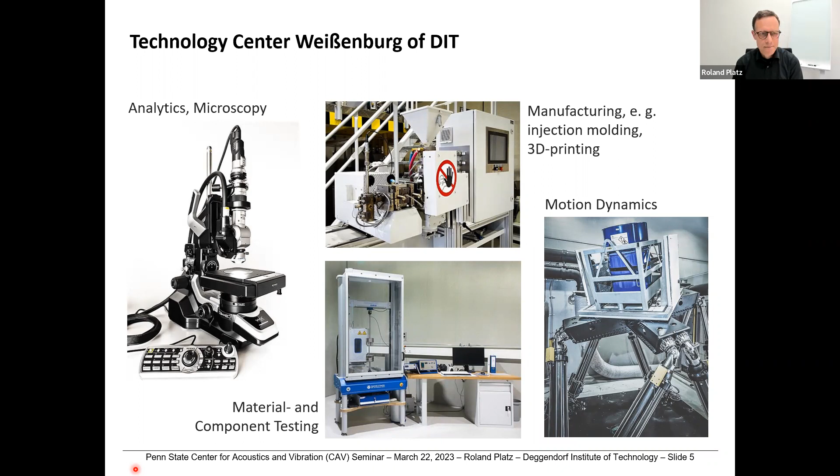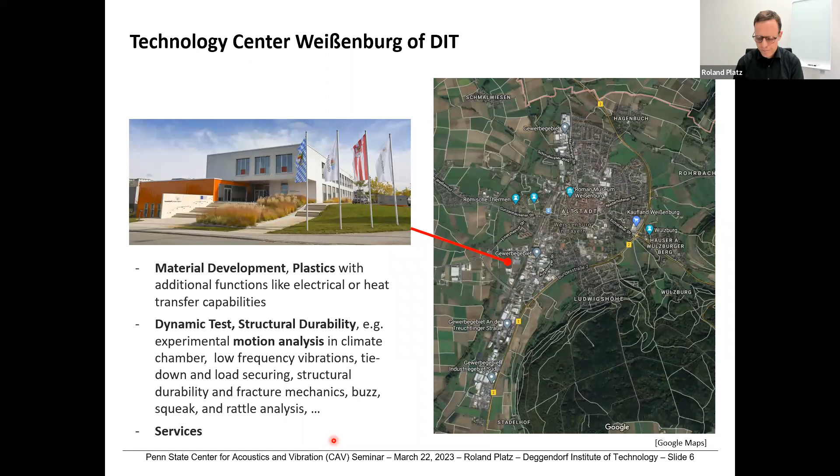The Technology Center in Weißenburg deals with plastic material development and applications, and also motion dynamics, which is what I'm working on. For motion dynamics, we have a rather big motion platform in the basement where we do structural durability and vibration tests. On the plastic side, we have manufacturing facilities for injection molding and 3D printing. We can do material testing, component testing, and analytics. We share this small building with another University of Applied Sciences; they do more of the teaching, and we do more of the technology work and research.

Model form in structural dynamics. This is one of the parts I'd like to point out. For those of you not familiar with the notion of model form and uncertainty, it's a wide range, there are lots of aspects, and it's hard to grasp sometimes. So I'll try to give you an introduction into what model form in structural dynamics means, what we consider uncertainty quantification, and what uncertainty actually is. I don't have to tell you where to find structural dynamic systems; you're very familiar with that.

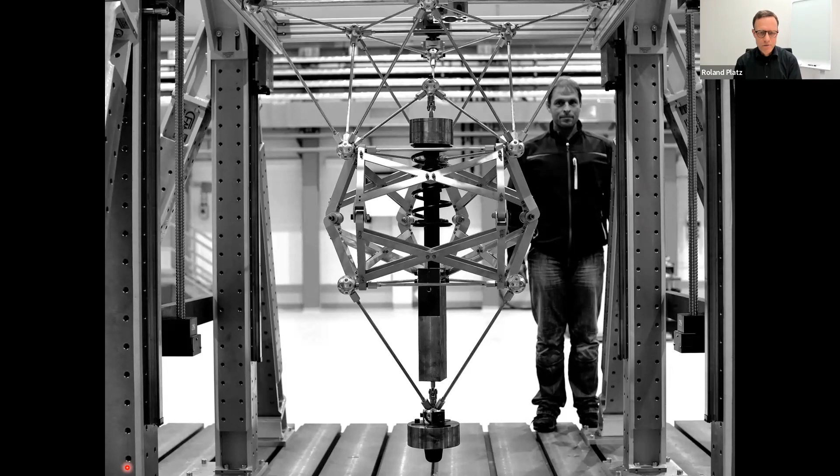Before I joined Deggendorf Institute, I had my sabbatical at Penn State University in the architectural engineering department with Dr. Sez Atamturktur. Unfortunately, after 6 months, we were witnessing the pandemic, so it slowed down a lot of things. Before that, I was involved in a collaboration of the German counterpart of the NSF, the DFG, the Deutsche Forschungsgemeinschaft, German Research Foundation, a big collaboration dealing with uncertainty in structures and structural dynamic systems. We wanted to know how loading and strength of a system may come out as an uncertainty measure. And we built a system with the same performance requirements as an airplane landing gear.

And we called that the modular active spring damper system. And this is how it worked. We had that in our lab, and we were just doing drop tests to see how the loading develops in that system. So we had different kinds of strut and strut elements. We had a spring damper system. We had joints, and all of that have their contribution to the dynamic behavior.

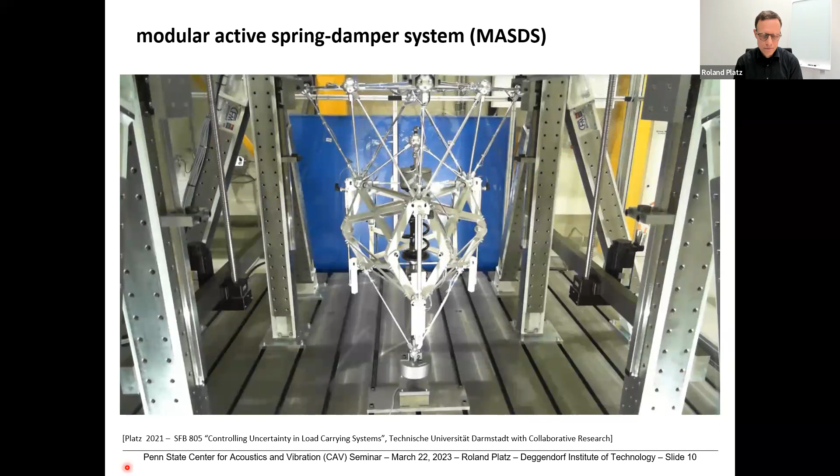And we were interested in looking at the uncertainty that arises in each development stage in the product development process, from the first idea to this strut or this spring damper system that you see here. Now, what model form can you actually use for that? Well, there are several options, as you of course know.

If you have a structural dynamic system, you need to answer the question, what kind of model am I going to derive for it to have the best representation of what is happening with the real system? Of course, we all know that all models are wrong, some are useful. That's the same as we have in here. For example, a multi-body representation of this system, or a finite element representation of the system. They all have their pros and cons.

They're all not perfect. And due to the fact that there is imperfection, we would like to know to what degree this imperfection is going to show itself. And that's where we need to look at uncertainty and uncertainty quantification, especially model form uncertainty quantification.

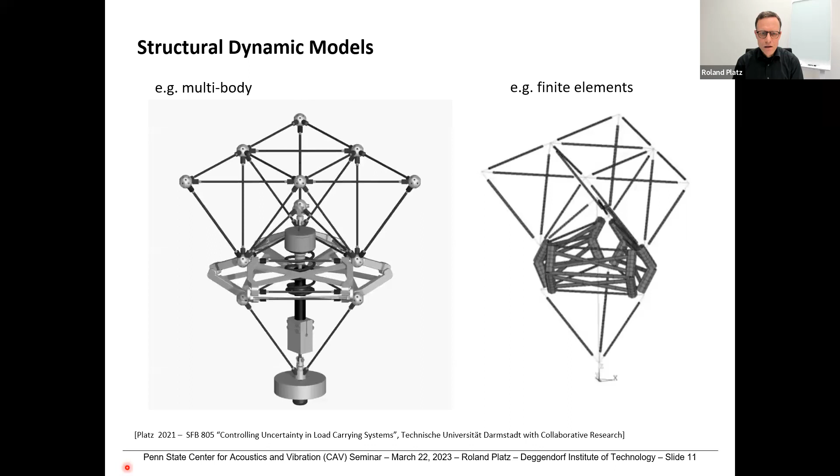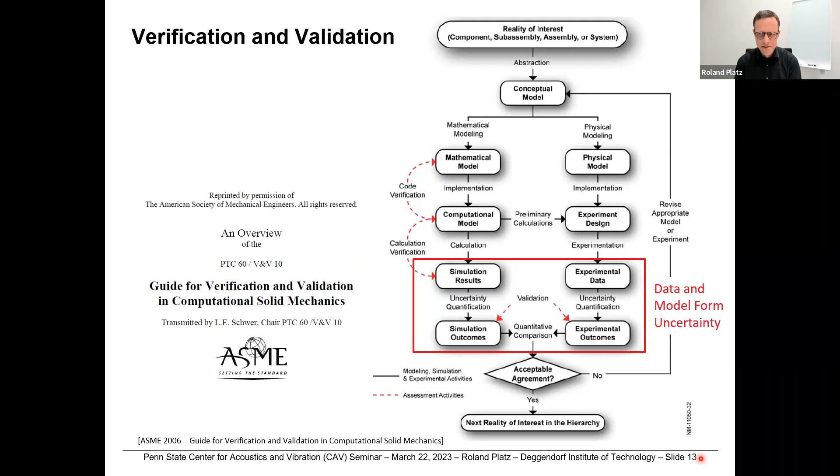So let me talk a little bit about the terminology of uncertainty itself. When I talk about uncertainty in structural dynamics, I mean basically two things. One is the model form uncertainty, and the other is the data uncertainty. Let's start with data uncertainty, which we are all probably more familiar with. It takes into account variability of parameter values, for example. We consider data as being model parameters as well as state variables.

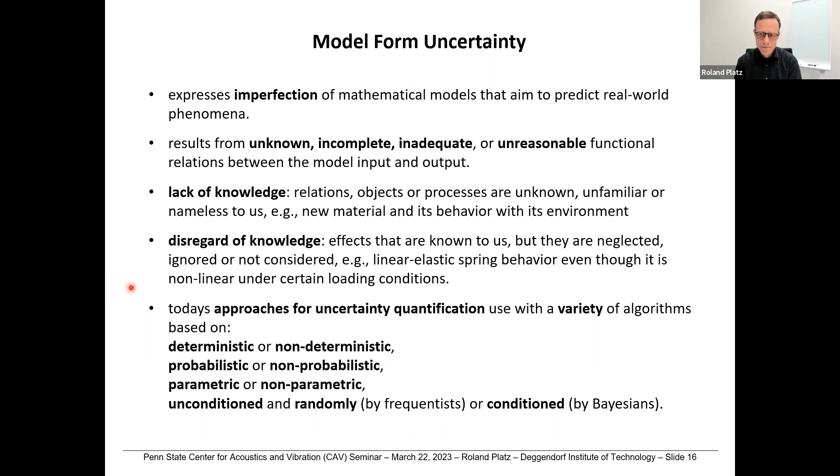So you can use deterministic or non-deterministic, probabilistic, non-probabilistic, parametric or non-parametric, unconditioned. That's when the frequentists come in, who say that everything is on a random basis, or the Bayesians, who say that everything is actually conditioned and there's no such thing as pure random chance. So you have lots of possibilities to do your uncertainty quantification. And those are the challenges that we face today.

From my personal point of view, and I've seen a lot of talks about uncertainty quantification, I've spent considerable time going through literature and attending conferences about this topic. What I found after some years is that somehow this model form uncertainty quantification is pretty much stuck in academic efforts and frameworks. Algorithms become very comprehensive, very complicated, and the mathematical costs are getting really high.

And the challenge to get to the idea behind each of these approaches is limited due to the lack of consistency and comparability in notation and application. For example, if you are in computational mechanics only and you don't have a real test rig, you just create your own application example.

A so-far realistic experiment, but it's never as, I would say, messy as it can be when you do real experiments. What I've seen so far, for example, is they just put a little bit of noise into their model outcome and consider that as the experimental test. But it's not just noise, it's bias, it's all kinds of stuff that is going on there. So there's also limited feasibility and practicability to it.

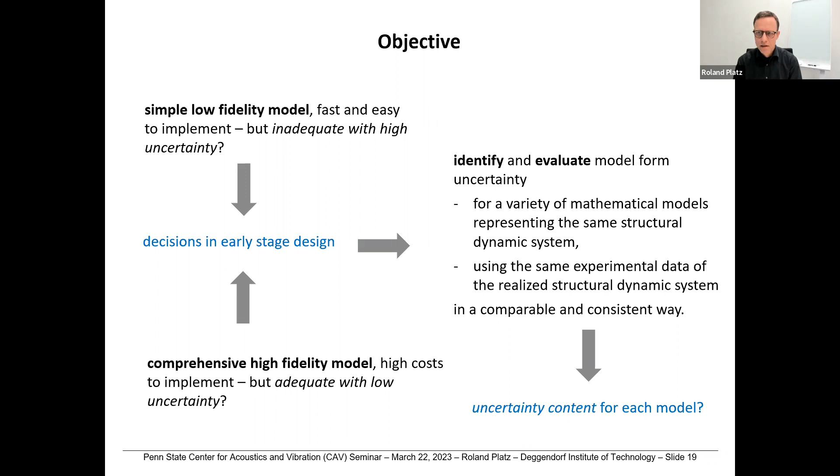So this reference structural dynamic model has to be, and that was the idea behind it, easy to understand. It has to be simple, but not too simple. We don't want to waste too much time in getting this system behavior tracked down and understanding the physics behind it. It has to be pretty much obvious. It should be a pure physics-based system that we can completely describe with physics, but also allowing phenomenological extension and improvements.

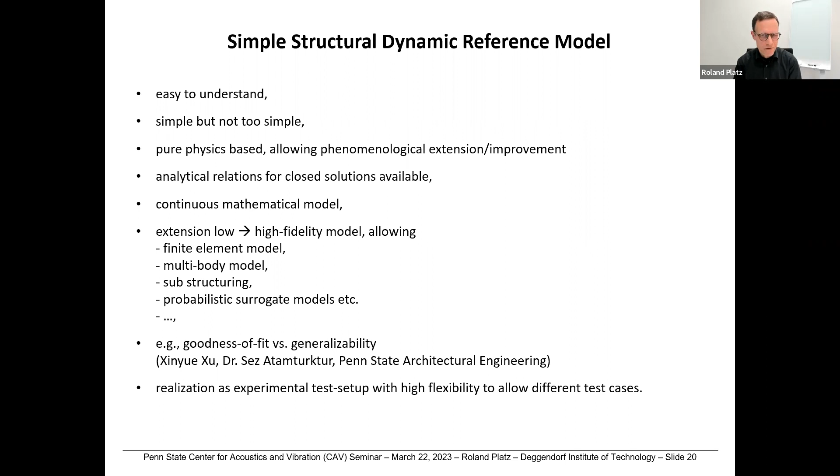The team of Dr. Sez, for example, right now is working on the same reference model that we have been working on for quite some time now, and is looking for the relation between goodness of fit and generalizability of models, and she's doing that with one of her current PhD students, Xinyue Xu. And the good message here is there is experimental data, lots of experimental data for this very reference model that I'm going to describe right now. And those of you who visited my talk 2 years ago may remember this picture.

The motivation was to find a system that is easy to understand and easy to model, but also allows for more comprehensive modeling. So I simply took a car and a compression leg and modeled the dynamic behavior of that very compression leg in that car. And if you do it in the simplest possible way, you just have mass, damping, stiffness, and that's it. But that seemed to be a little boring in the beginning.

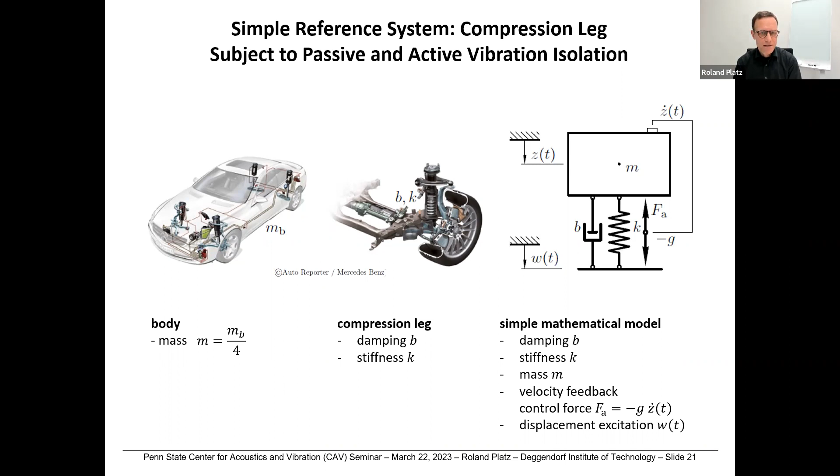So we thought we'd make the system also active, meaning that we add an active force into it, which will be realized by a velocity feedback control force to also allow better dynamic behavior. And this leads us to a vibration isolation problem that can be done both passively and actively. So what do we mean by that?

So if you have the passive configuration of this one mass oscillator, and you add an actuator and energy into it and have it active, then you can overcome this well-known trade-off in vibration isolation: if you have high damping going through the resonance, you lose this benefit in your isolation frequency range. And if you have very low damping, it's very bad going through the resonance, but it's very good going into the isolation region.

And having this system active solves this trade-off, because you can have high damping going through the resonance and also high damping being in the isolation region. And this you see in the curve of the amplitude frequency response with the thick lines. Those are the active cases, and the thin lines are the passive cases for different damping.

And I was choosing one particular case that is in red, where you see that until you reach the resonance, it has the same dynamic behavior, but due to the fact that I'm going active, I have a much better behavior going into the isolation region. Now, how can I model this? This is the simplest way to model it, one mass oscillator.

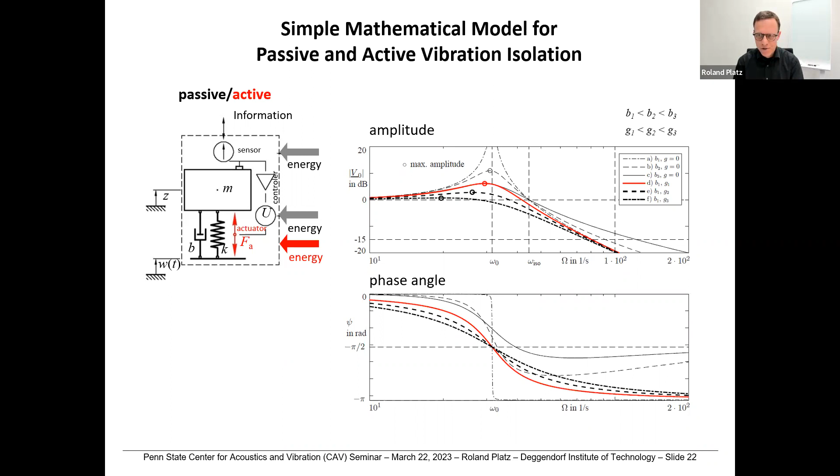But also with this very simple model, you can ask yourself, do I only stay axiomatic? Do I just stay linear? Do I just stay time invariant? Do I just stay with low fidelity in this model? Or do I allow to improve my model when I validate it to have empiric, nonlinear, time variant, high fidelity issues here as well? So what we did so far is I was doing the investigations for model 1, the one mass oscillator model.

I was creating a 2 mass oscillator model of the same problem. We will see why the 2 mass oscillator model comes into place. And model 3 is a finite element representation of the very same thing. And there are numerous other models out there. And this is what I would like to ask maybe some of you, who would work on a model that is modeling the same system, but in different ways, and then validate that against the very same experimental outcome.

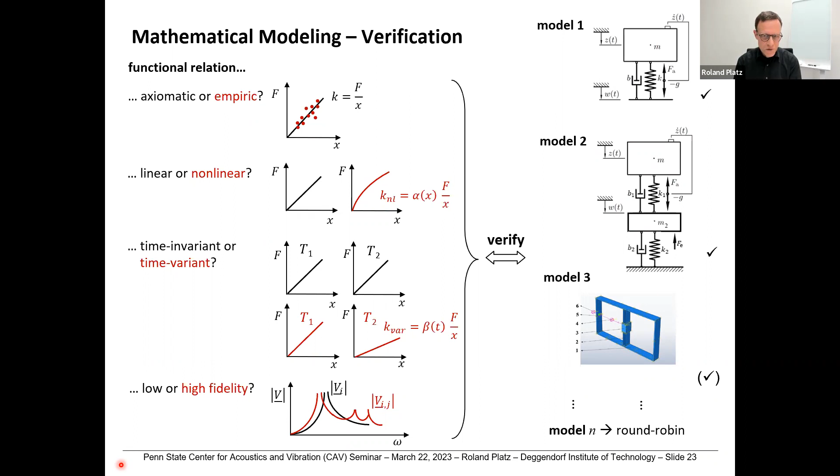So we verified so far these very simple models. And when it comes to model validation, we were validating that with the experimental and realized system. And I will come to that realized system in a moment, because there's not that much to see right now, except that you obviously excite the system with a modal hammer. So for now, the takeaway is we have a realized system and we have experimental data to validate all different kinds of mathematical models.

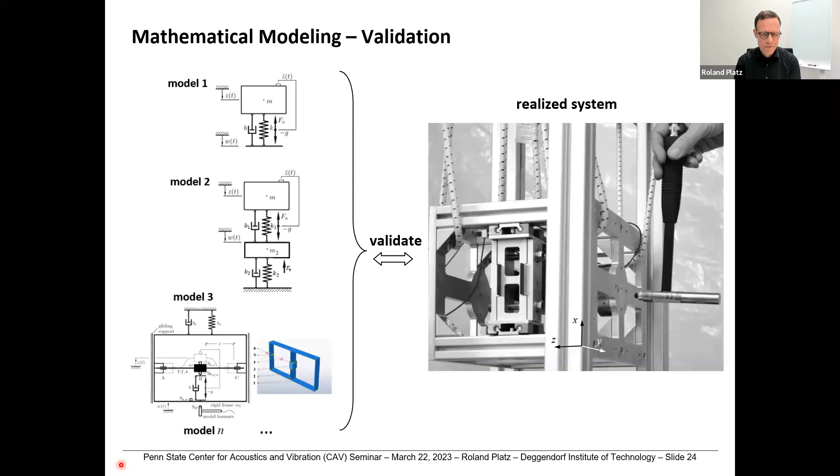If you look at this table here, so far we have model 1, model 2, model 3, and model n is yet to be defined within the round robin, for example. And you see different categories, what the model is standing for. Is it analytic, numeric, axiomatic, empiric, linear, nonlinear, and so forth. So if we look at the very simple model 1, we see that it's analytic, it's axiomatic. There's no discretization, no empiric data, no nonlinearity, no time variance, no high fidelity. We did calculate an outcome, which is not that hard for a one-mass oscillator.

So far, I was calculating the discrepancy between the model and the experimental output, but only deterministically. The uncertainty going probabilistically is still pending. We also did a 2-degree of freedom model, but it has the same criteria. Its discrepancy and uncertainty are also still pending. For the finite element model 3, the discrepancy and uncertainty have not even begun yet. But as I said, there are more models to come, and they all have to validate themselves against the realized system.

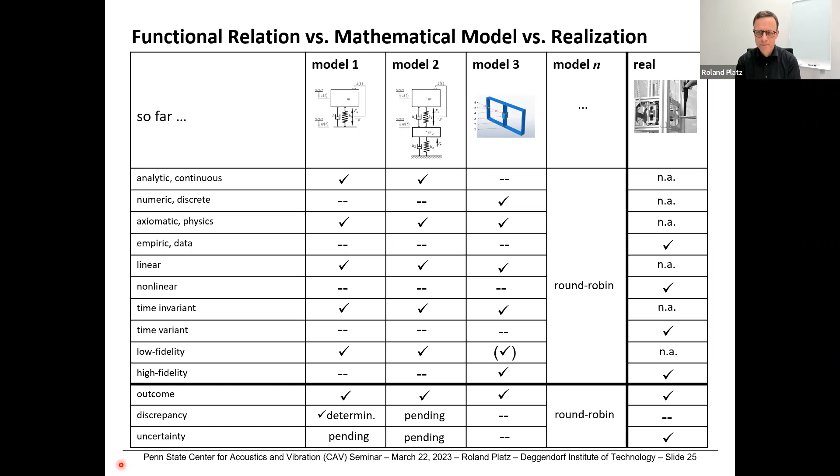So this is just another wrap up of what we want to do with the round robin. I just skipped that. So for the last 5 minutes, I hope I still have 5 minutes.

I'd like to show you ongoing and past investigations on this most simple model form that we were using. So you have the one mass oscillator. It is analytic, axiomatic, linear, time invariant, has low fidelity, just uses physics, and it's continuous. The equilibrium of forces is there. You have the excitation. In this case, it's a base point displacement excitation for this vibration isolation dynamic outcome.

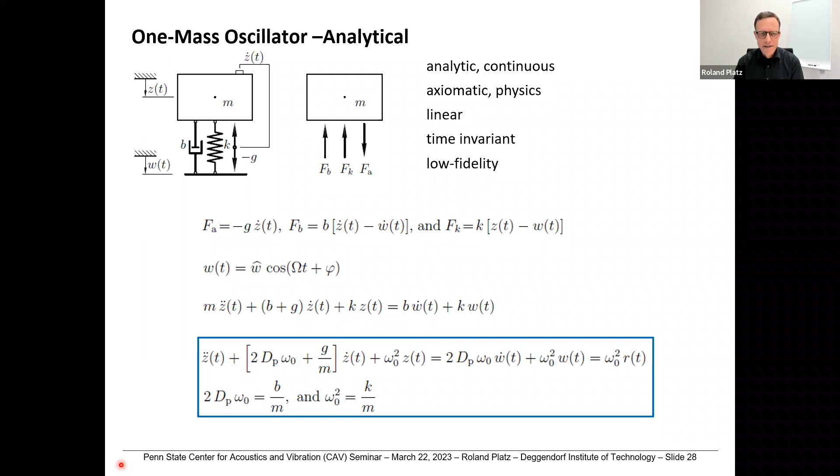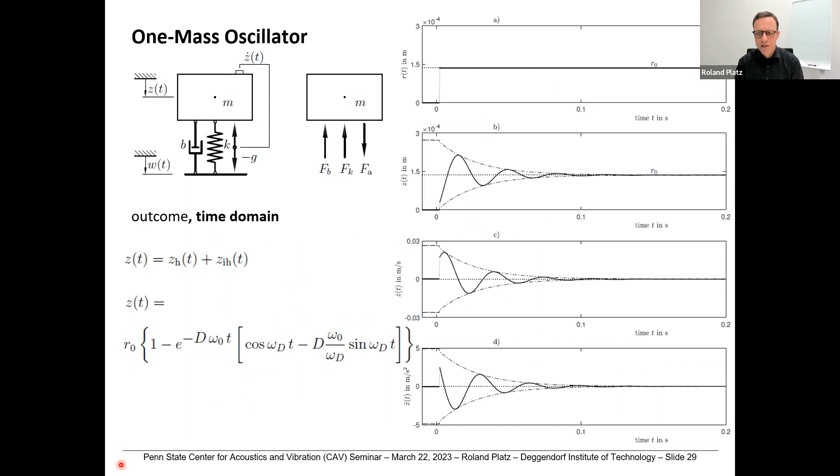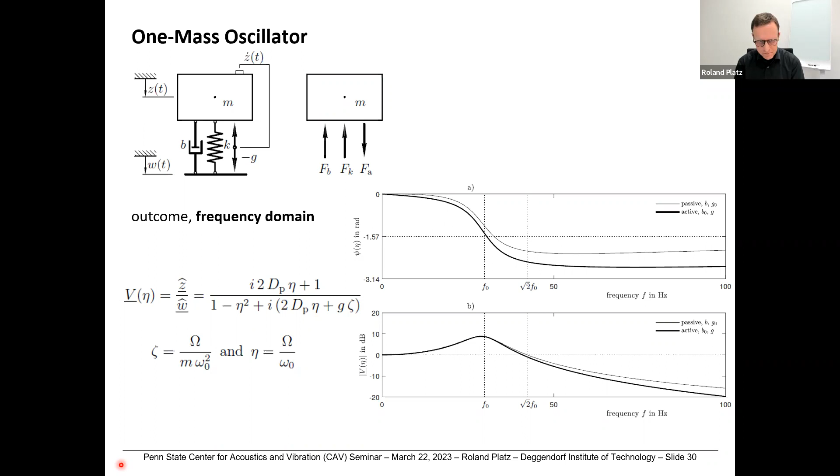And now we need to validate that against some experiments. So how did we realize that experimentally? And it turned out it wasn't that easy just to have a one mass oscillator subject to vibration isolation to be transformed into an experimental setup. So we did some tries, and then we came up with the idea that we actually put this one mass oscillator into a frame.

I actually wanted to have a shaker, but I didn't have the money to do that. And when I went to your university in State College, it would have been too heavy to carry on. So I decided to just use a modal hammer for that, and that was doing the same good work.

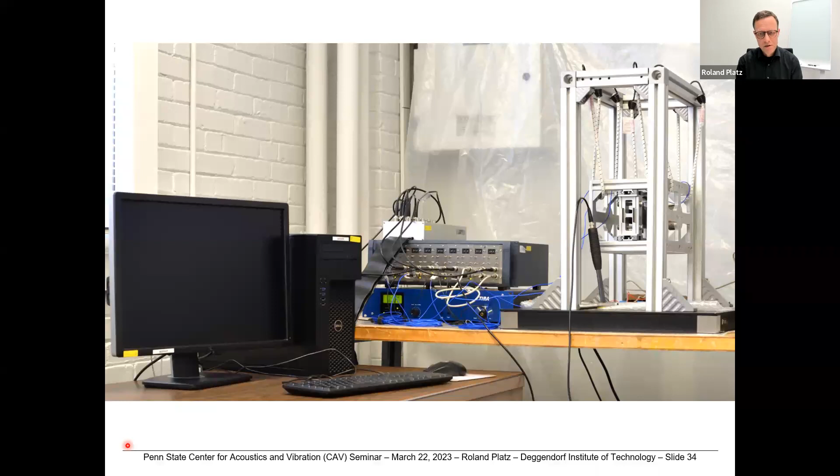And for damping, which is always the critical part, we used a simple voice coil actuator that we used for the passive damping and for the active damping. And it creates an active as well as passive damping force. And we had here a dSPACE system, a real-time controller that is giving us the controlled damping forces in case that we have pure passive damping or pure active damping. And that worked actually very fine.

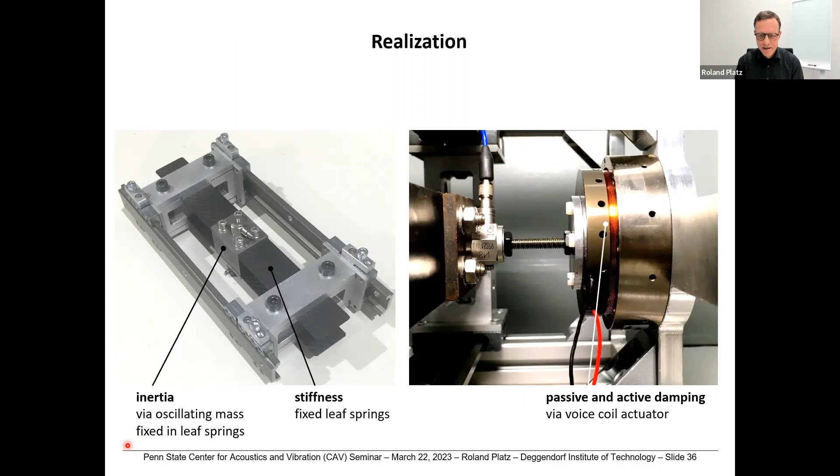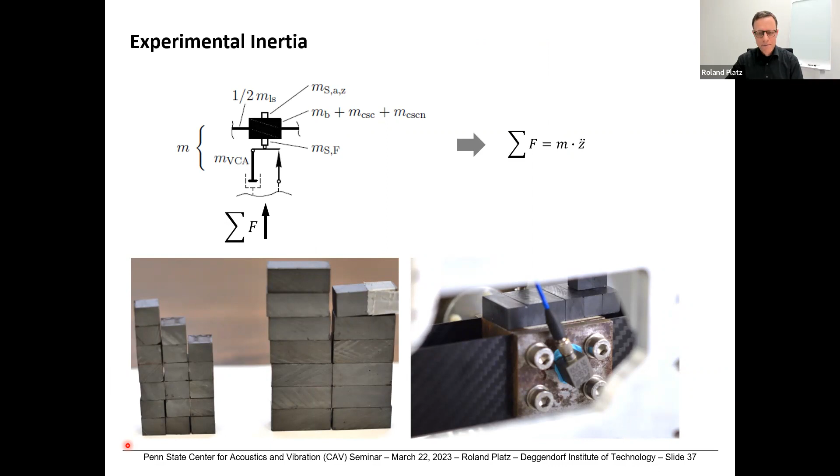And this is how we realized the inertia, the stiffness, and the passive and active damping with the voice coil actuator. And here you see that changing the inertia was simply done by magnets that we put on the original mass. So we are able to vary the mass of the system. We are also able to vary the experimental damping output by using the voice coil actuator and taking into account the electromechanical circuit.

Now, what kind of data is available? Also, the data I would like to share with everyone who is joining the round robin is when you look at the design of experiments. I was creating 3 different scenarios for stiffness, for mass, and for damping. So all in all, I was creating 3 different stiffness cases, 3 different mass cases, and 3 different damping cases for passive and three damping cases for active.

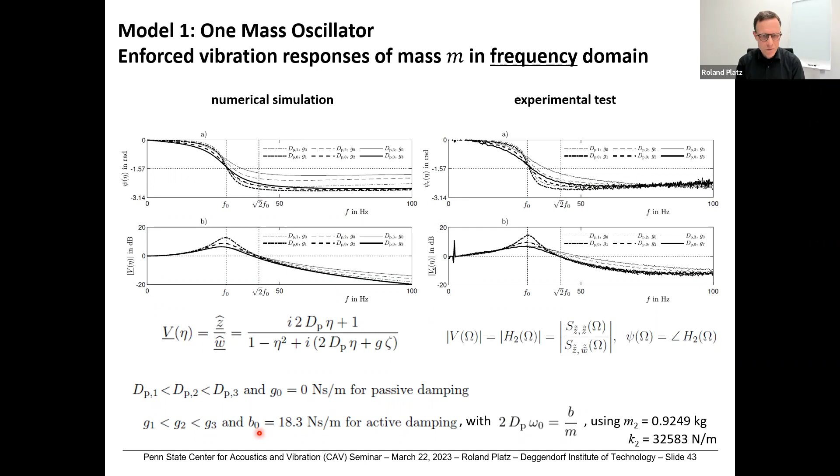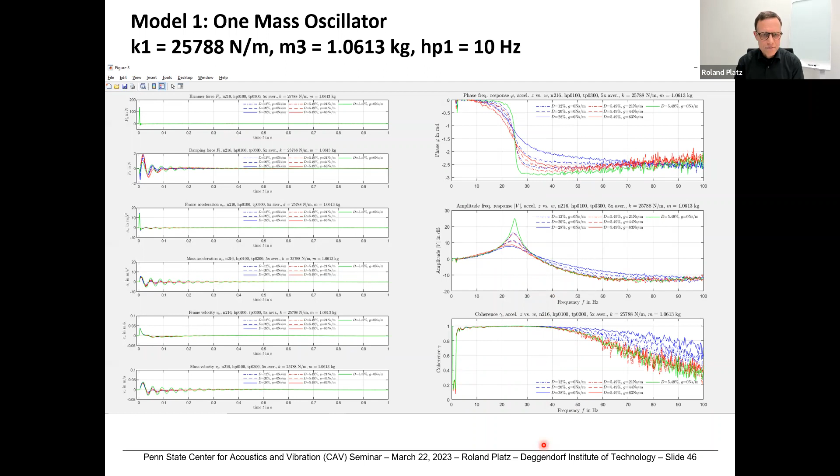Now, the first look into the discrepancy when we have a passive vibration isolation case and we compare the numerical output with the experimental output. And I was just doing a deterministic least square fit of the parameters that you see here. And I was using control parameters that I pretty much know how to handle. That is the frequency and the mass, which is easy to weigh. And calibration parameters were just the stiffness and the damping. So it was kind of a model updating.

And you see here 3 different cases. This was for the lowest damping, this was for the medium damping, and this was for the highest damping. The phase shift, the amplitude frequency response, and the coherence function. And you see the higher the damping, the higher the discrepancy. Whereas if you have very low damping, then you have very similar simulated and experimental results.

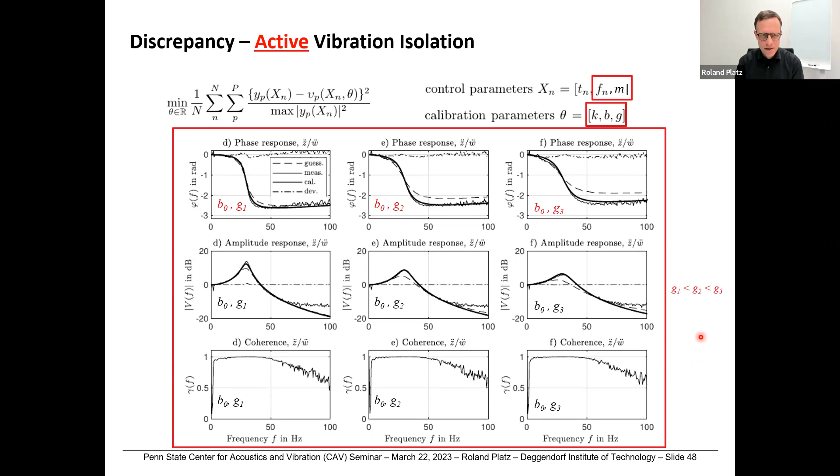And so at the end, what I want to have is, according to the Kennedy and O'Hagan and Higdon approach, to describe the experimental outcome with what you are simulating here. So this is the simulated model, this is your discrepancy function, and this is your experimental measurement error, which is in most cases just noise. But it isn't only noise. It also contains, and this is brought in from me, some kind of a vector that considers all kinds of measurement uncertainty and also the bias that you will get.

And in this particular case, noise is not that much of an issue. It's the bias, and it's the wrong physics that I obviously use in this very simple one-mass oscillator model for the damping. So to make a shortcut, I know I'm running out of time, so just give me one more minute and then I'm done. So I was looking into the measurement uncertainty for experimental damping.

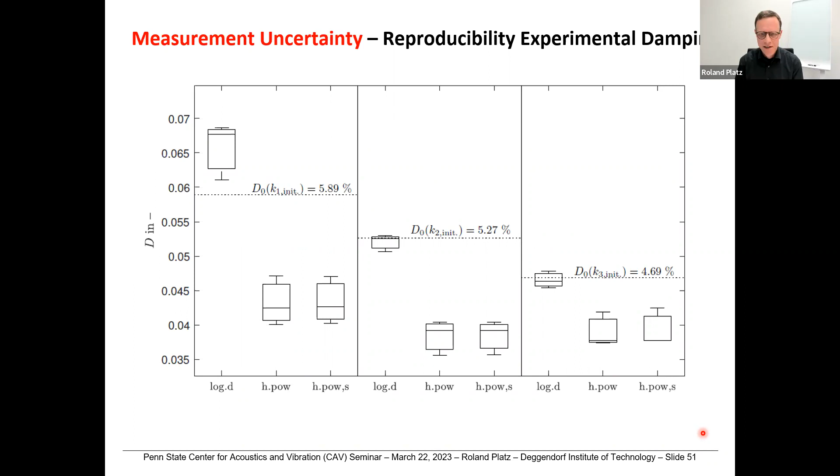And I saw that if I measure the damping in different ways, like using the logarithmic decrement in time domain or the half power bandwidth in frequency domain, and use also symmetry assumptions, then I get different results for my damping. So what is my correct damping? I don't know. I have tried quite a bit with different approaches, and you always get different results, but that's damping. So I saw that there is up to an 8.8% deviation in damping in this case.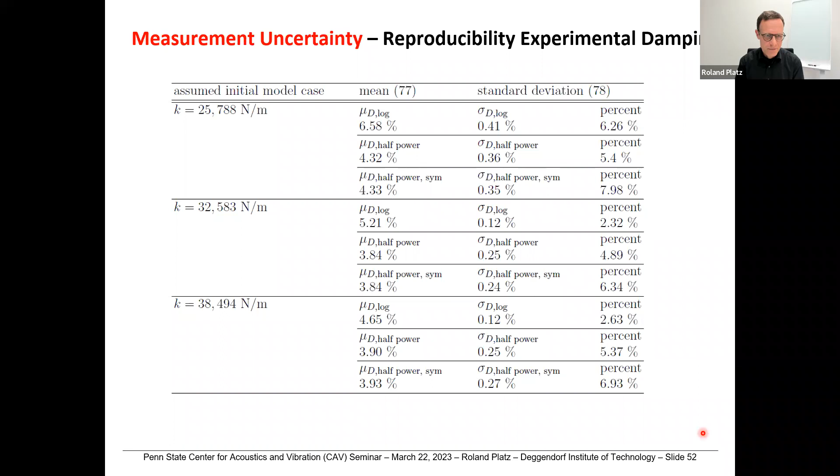What about reproducibility of the stiffness? So I was mounting and demounting the whole test rig and trying to get a force displacement diagram to see how the stiffness is evolving.

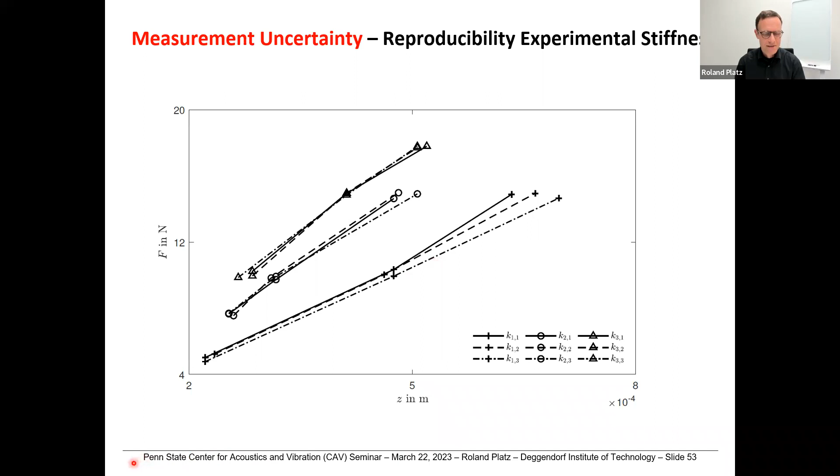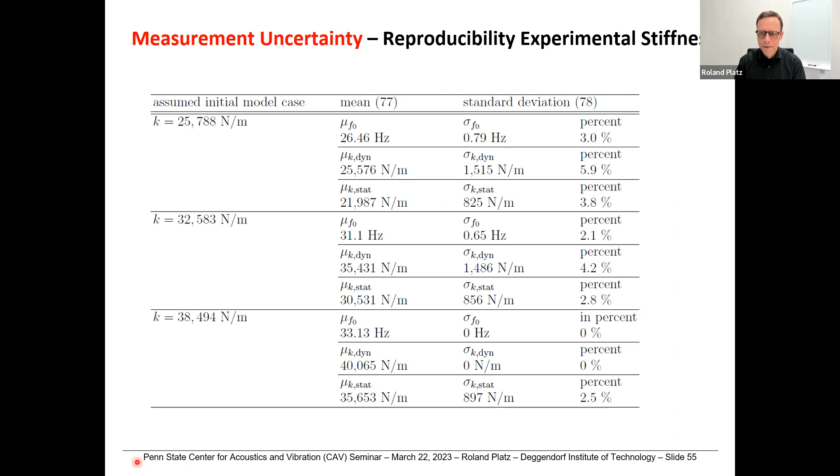So let me just go directly to the conclusion and outlook. First of all, what this example shows you is one side effect, that the active approach is doing what it's supposed to do. It enhances the vibration isolation behavior. There is data uncertainty. I checked that. So it is all within the margins that the manufacturers are giving us when it comes to the sensors and

the sensibility of sensors. Model form uncertainty: so far I was just using a least squares minimization, and doing that I noted a poor prediction quality when it comes to high damping, especially when it's passive damping. So obviously this model is too simple, it's incomplete, it's insufficient, and it's inadequate for getting validated.

So this gives me the reason to look at other models, but I don't have the strength to do it all by myself. So I'm looking for help to do a joint collaboration in a round robin. And when I was at the IMAC conference last month in Austin, I was also offering the attendees over there this concept of the round robin. And we will have a special session next year and the following year about this very problem.

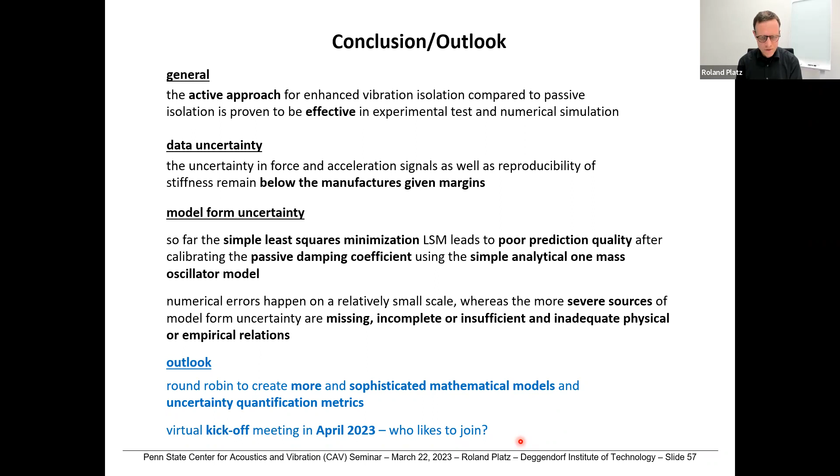And everyone who is interested in working on that problem, meaning finding different models and finding different uncertainty quantification measures, is welcome to join. And I will have a virtual kickoff meeting next month. And if you're interested in learning more about the round robin and how to contribute, you're welcome to join. So just contact me for the round robin.